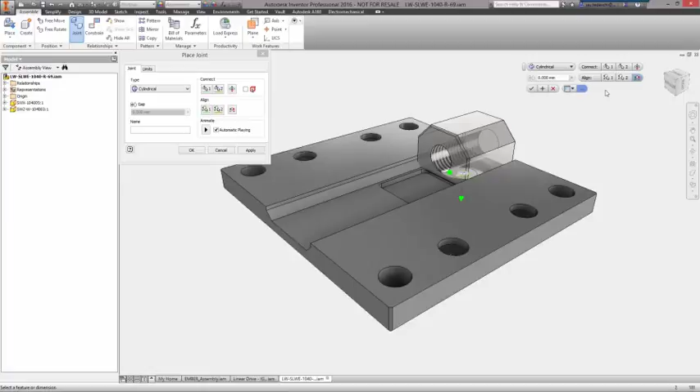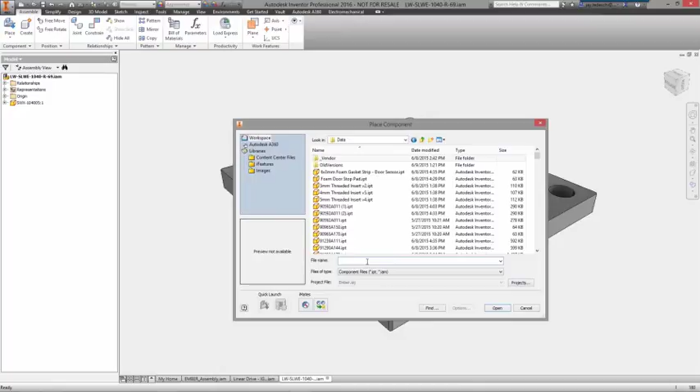The culmination of your design work comes at the assembly level. It's here that you can assess fit and function, identify interferences, and then use the model downstream to create renderings, simulate how your product will perform, develop documentation, and plan manufacturing processes. But first, you need to put it all together.

Just like in the part modeling environment, a marking menu is available that contains a complete list of your most commonly used assembly commands right at your cursor, such as placing components and adding constraints.

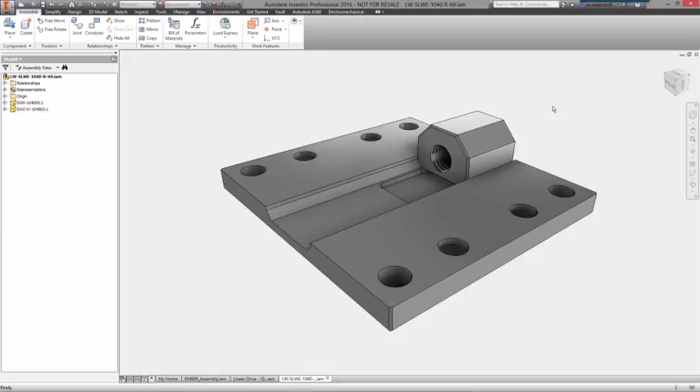Once a component is placed, assembling parts together works much in the same way as you would do it in the real world. Using joints, you can fully define the location and motion between two components in a single step, rather than specifying constraints one by one.

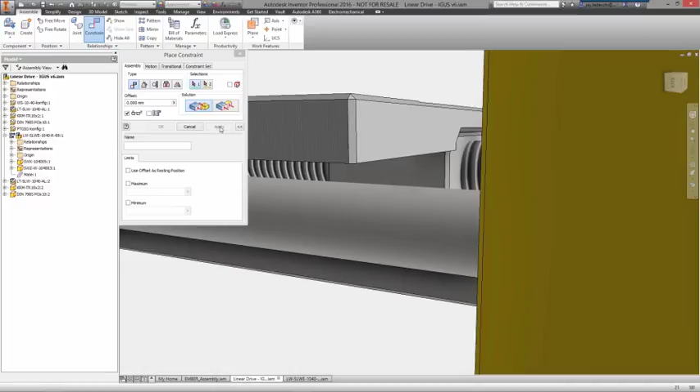Joint types are determined automatically based on the geometry you select, and all degrees of freedom are accounted for once the command is executed. Relationships can also be added using traditional constraints, which gives you a finer level of control over how the assembly behaves.

Adding limits to a constraint specifies exactly how components can move, so you can perform motion studies to evaluate how mechanisms will operate in relation to other features of the product.

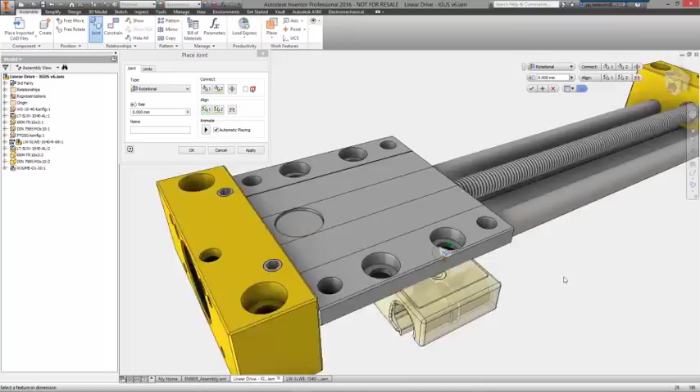Because it's rare that an entire product is composed of parts or subassemblies that are designed in-house, Autodesk Inventor supports opening and inserting third-party models directly into your assemblies.

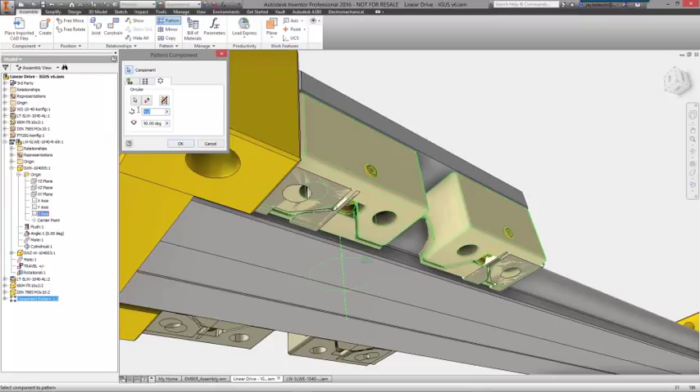These models can be constrained exactly the same way you would a native Inventor model, and they can even be patterned when multiple instances of the component are needed. And because there is an associative link to the original file, if that file changes, it will be automatically updated inside the assembly without having to go back and reapply all your constraints.

One final source of parts is the Content Center: 750,000 parts covering 18 international standards. It's like taking a trip to a perfectly stocked hardware store.

Many components from the Content Center have intelligent mates built in, so constraints are created as you drop them into the design. They can also be resized dynamically in the window, and existing patterns will be followed so components are created automatically at each appropriate location.

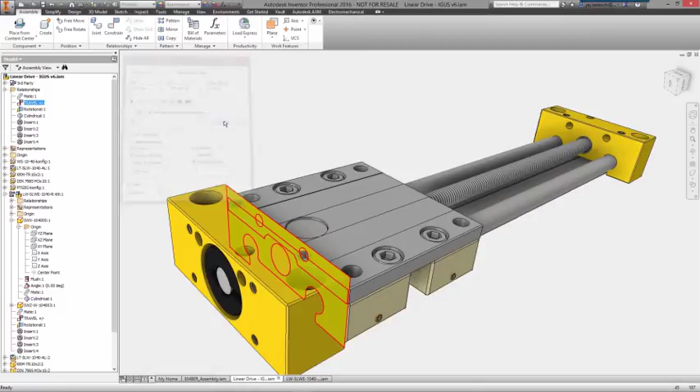Regardless of where your components come from or the approach you take to defining the relationships between them, Autodesk Inventor gives you the tools you need to put it all together in a perfect, complete model of your product.